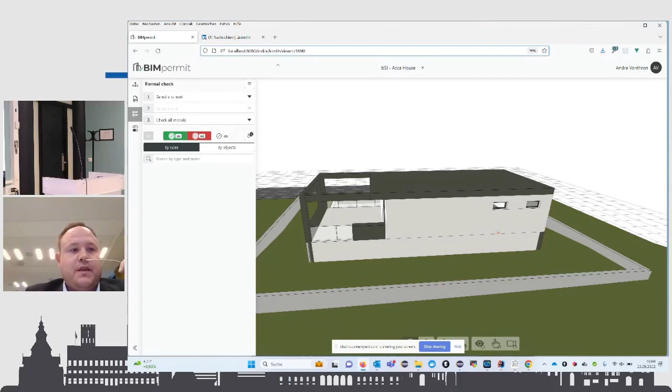Again, my name is Andre from VSK Software in Germany. We have a product, BIM Permit, and now you see the product, the model is loaded, and now we have here the IDS file from this morning with the 4 different requirements, and I basically can select here different IDS files, upload them. I showed how to edit and import, export them yesterday.

Then you can also select partial rules of it if you just like to check one part of one specification. And then you could also select which model I like to check. In this case, we only have one model, so I just check everything. And then I can execute it. And on the left-hand side, I see how many were successful, how many not in the specifications. And then I can dive into and see what objects were successful, which objects were not.

And we see in this case, we have stair flights and stairs, where stair flights are part of stairs, depending on where you define the specification. In this case, it was defined for both. So we have some positive and negative objects. You can dive into and see, here, some classification may be missing, and in the other one, you can see it here.

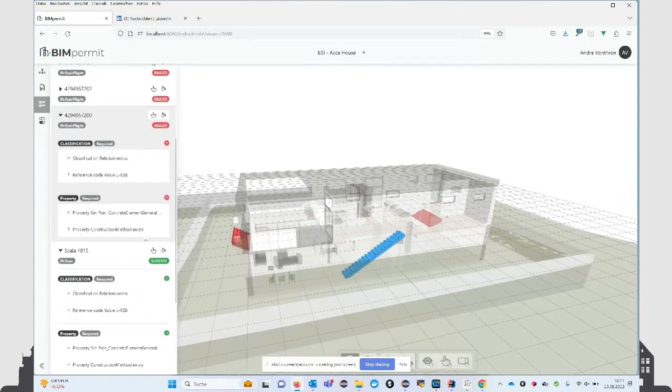It could also select one of the objects and then retrieve the properties and see, okay, in this case, we don't have any classifications here. For example, if we select the other one too, we will see that it's not selectable, it has no geometries, right? So in this case, not possible.

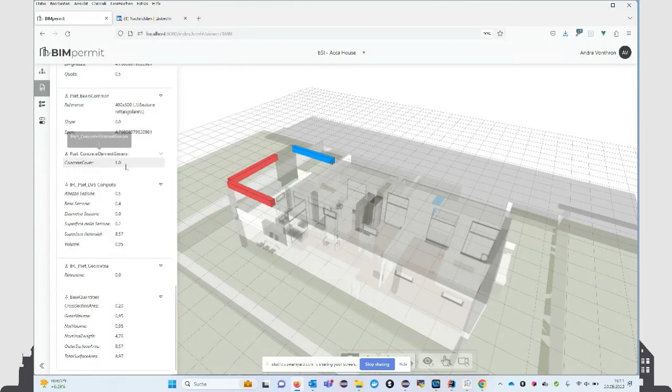Second example, when we look at the beams, we have also some positive, some negative. We have some properties here, and we could also inspect them in the property view and see, okay, I have my property. What do we have here? Concrete cover has a number in this case. I don't know if it was right, but we didn't set any data type and restriction to the value yesterday. So for this case, it's very fine.

Maybe because of the waffle maker, there is a case here where we said yesterday that it was an IFC element proxy, and that could have a specific classification. So in this case, as you can see, we have a lot of proxies which were tested. So the right way here would be to filter it first. So that does not apply 100%, but what we can do, we can find out. Let me see here. I have some. We can just select it and

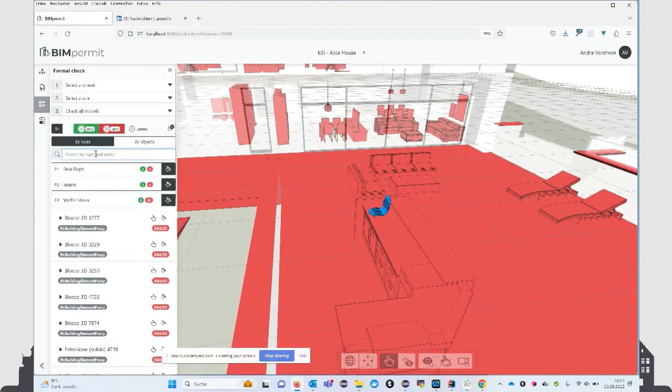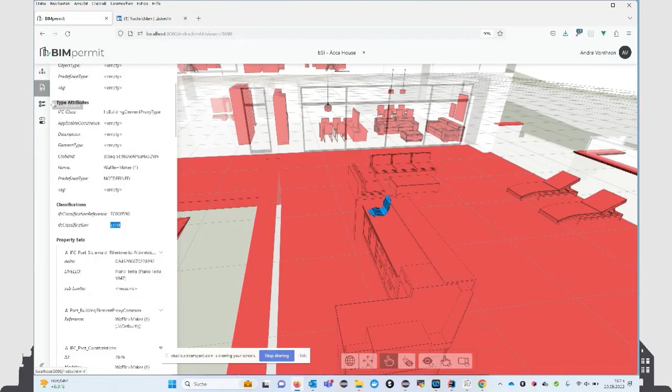So that is how it works in our software, and what you can do now to transport it to other software: you can export everything to BCF for this model and this rule set, and then you can go into your software of choice and import the issues you have. So I like to open here the current BCF file, and then you see all the issues if you have objects which were not fulfilling it.

Let me see, for example, the stair flights. We see the stair flights here, and now the configuration is that we export all failed objects and mark them. It will be configurable in future. So, for example, you could make other objects here also transparent. I think that is clear from the workflow.

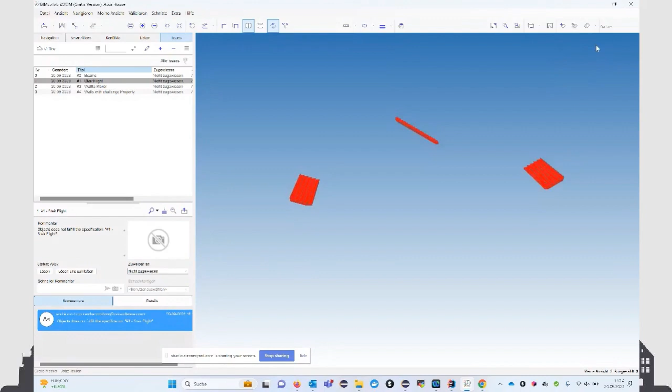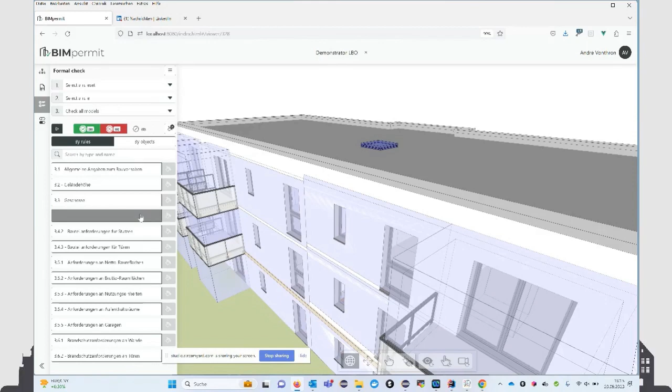And the last thing I want to show you is we made some examples here, but we already did it in working projects in Germany. So we have a pilot project for digital building permits, and we set up a modeling guideline, and we completely did it in IDS to have a digital representation of a large number of requirements. For example, you have here an example with the doors. The family was updated and the parameters were missing. And if you begin to do technical checking, it's very important to have these requirements fulfilled.

And that's all for my presentation, and I'm very happy to answer questions and give over to the next presentation. Thank you.

So including the screen sharing issues, you still had 6 seconds left, so perfect timing. That does mean we need to move on to the next one to make sure we are on time. Can you hold the questions till the end? Or if you're quick, until the next one is set up? Yeah. So there's a bunch of questions I wanted to ask each implementer. It's a second though, so they're very few.

One. So do you actually run the verification, the auditing of the IDS before running with this? Yeah, I think we had the question before, but there were some little issues I wanted to ask because of the parameter list from yesterday. So that would be interesting to discuss because we didn't set it up in the specification. But that I think must be fulfilled. I was wondering why it was not uploaded, but I can run the test if you have different results. No, I was just asking if your user interface presents to the final user the result of the audit. Okay. I will explain the reason why it's not. All right, next one.

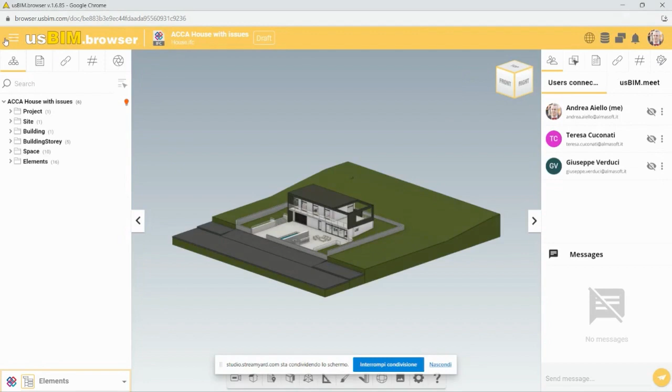Okay, thank you everybody again. Good afternoon. I'm going to show you the result of the check. So let's open my model and open our usBIM.IDS. I select the IDS from usBIM.

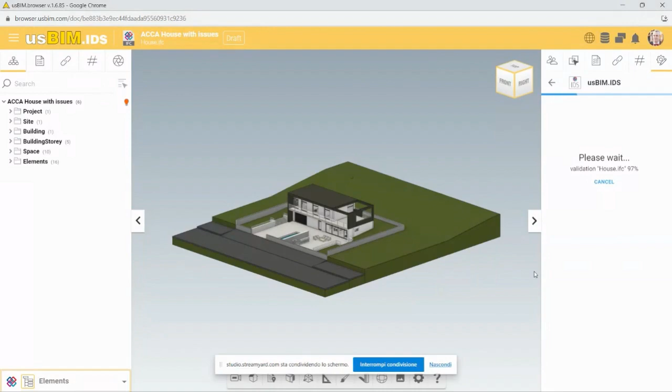I selected this one that Léon changed this afternoon, but it's the same result. In this example, we have 2 errors just to show you something, because otherwise we have no errors. It's more difficult to show you this part. So we have 2 errors.

They are already highlighted here, these 2 walls. And here we have all the 4 specification. If I click here, I have just a quick review of the info about the IDS. If I select here, I have the specification info again. I can read in English normal text, the model must contain, and all this stuff.

Here I have an issue report if this specification has some issue. If I click here, I have all the IFC elements related to this specification, and this for each one. If I click here, this is red because we have some errors here. The walls, the first 2 walls have something wrong.

And if I click on the single IFC element, I have here the problem, the issue. So in this case, property not found, error 301, we have coded the errors. So in this case, we have a property not found. In this other case, we have the property is invalid value because there is a letter S more.

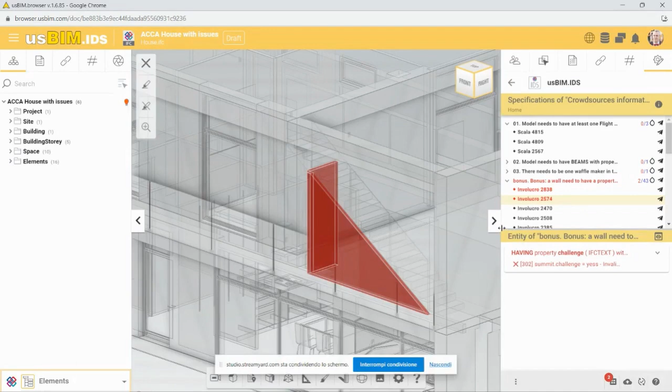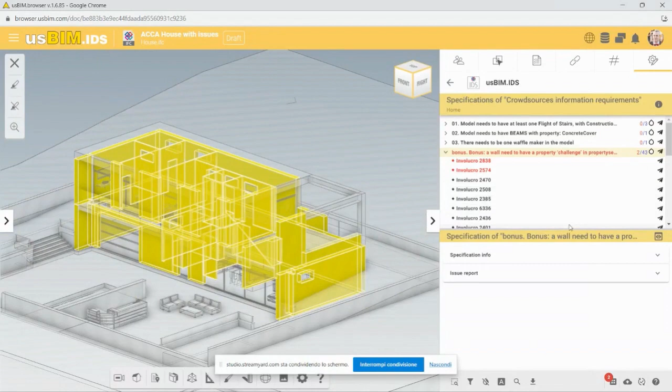So basically, we have a quick view of everything. We can select each of these elements. So I click here, I select the elements, each one or all together. I can, for each specification, give a color and see it colored by the element, colored by specification.

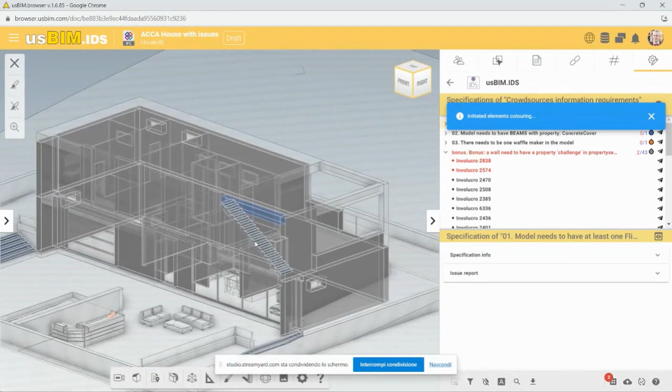I can create an automatic coloration. So if I go here, I click color by specification, I get all the IFC elements colored differently based on the specification they belong to. So I can have this view. And there is another view, color element by issue, because for each issue we have an error code and a color. So when I color by issue, they become colored in a different way.

Now we have just 2 types of errors, so it's not very colored, but believe me, usually it's more colored.

I can also show the error code directly on the IFC model. So this wall has error 301. 301 means not found, property not found. 302 is property value wrong. Anyway, here we have all the specifications and the types of errors that you can find for the facet.

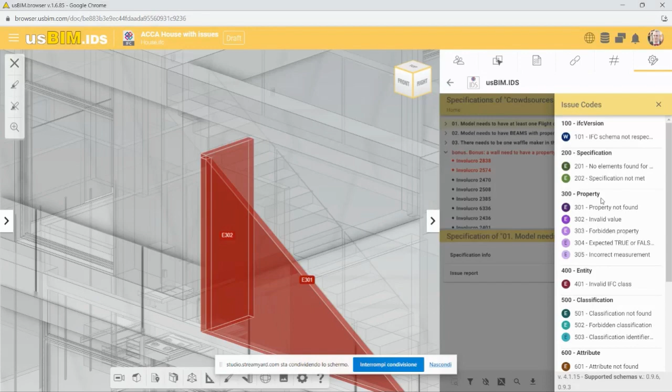And here we have a new view of the bugs, by a table view, so I can add more columns here, order the columns, or group them by code or by IFC element, and so on.

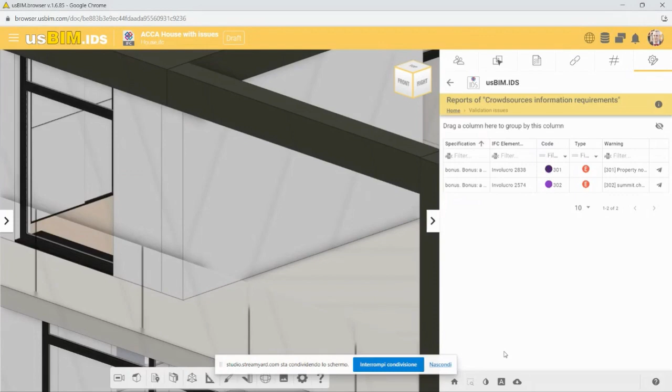After that, just to be quick, I can download the issues in a different format. I can download it in, if I go to, a BCF format. I can also download in CSV and Excel format.

I can also download a specific report of the issues with all the information about any specification, how many errors, what type of errors. In this case, it's very simple because we have just 2 errors. We can also download the IDS file.

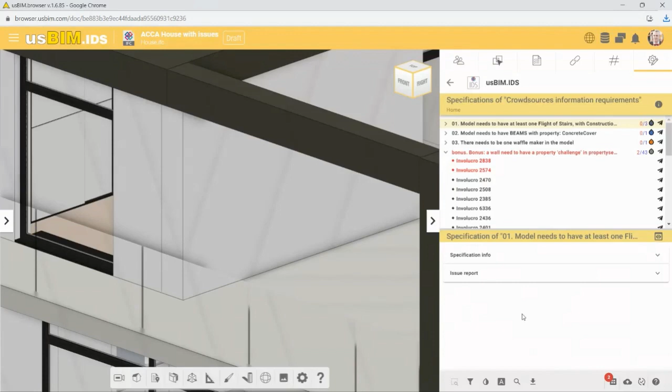So as I showed you, we can download the BCF file, ask to someone else to change the files, the IFC files, the properties, but we want to work in another way today. We'll try this because it's a BIM collaboration. So let's collaborate with someone else in another place.

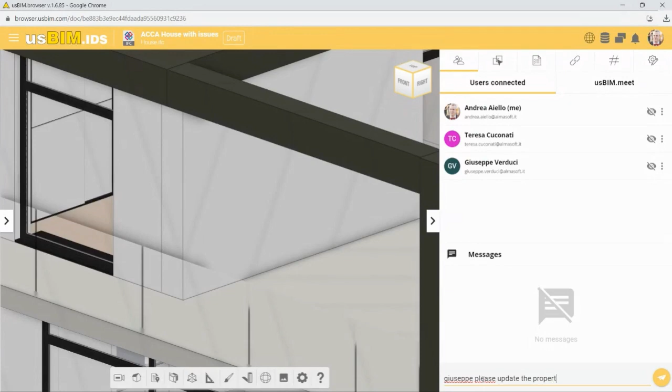So 2 other guys are connected here, Teresa and Giuseppe, that I want to thank because they are connected here. I can ask them to update the property. So I ask Giuseppe to update the first property, to add the property. Giuseppe, please update the property. Meanwhile, I change the property myself by using usBIM.editor.

So I select this wall and come here. Confirm. Wait for Giuseppe. Giuseppe, okay, he's doing it. It's quite fast, but we like to do this type of presentation, quite live.

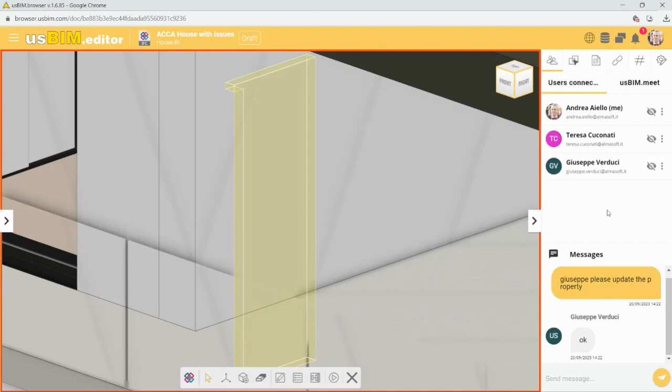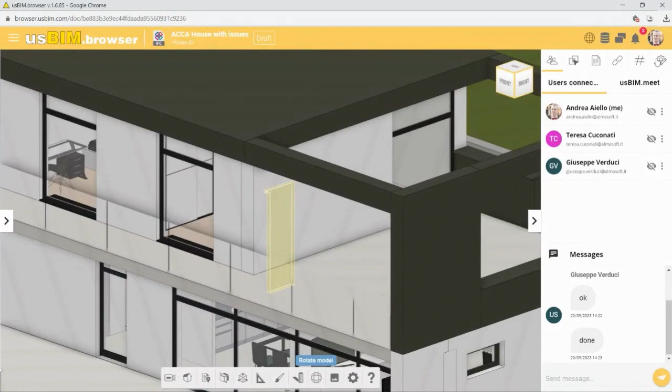Done. So I come here, I launch the validation again. Validation is okay. So the 2 properties have been added and updated.

If I click here and go to the property set, I see that now the property should be yes, with 1 S. Where is it? Okay, here. And the other one, just believe me, it's changed, it's been added. But now I just want to show you something more.

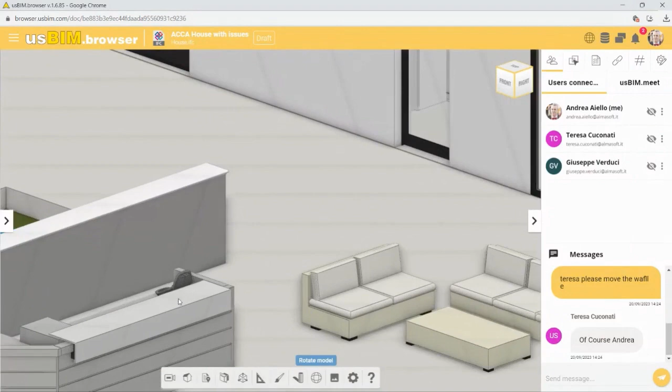Just ask Teresa. Teresa, please move the waffle, I don't like this place. I don't touch anything, my hands up.

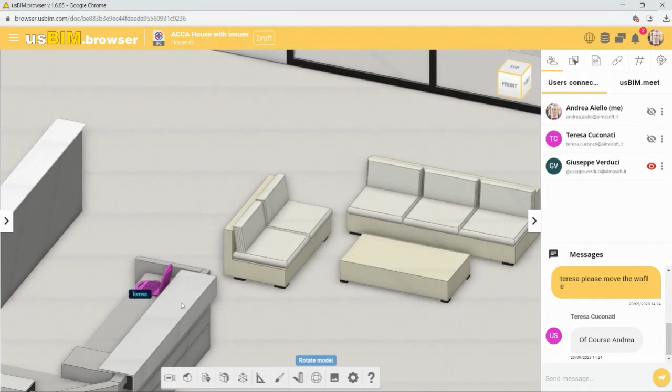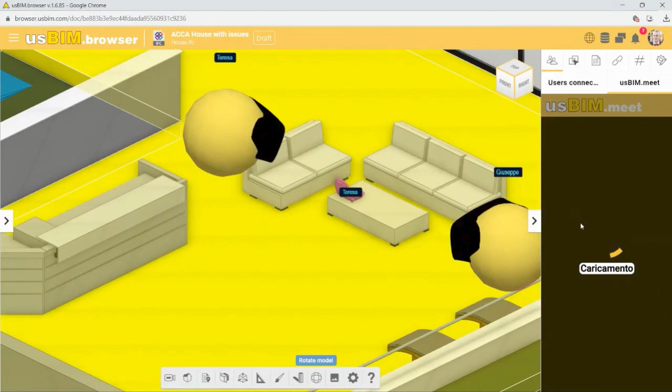She has selected the waffle machine, you can read the name, and it should move. This is Teresa, the avatar of Teresa, and this is Giuseppe. They are watching the same waffle. They are real men, so if we go here, we can see them as well. I hope so. Yeah, Teresa and Giuseppe.

Hi, hello. Oh, the camera is already, yeah. Hello Giuseppe, hello Teresa. But at the end, please Teresa, remove the waffle machine, I prefer pizza, so please remove it.

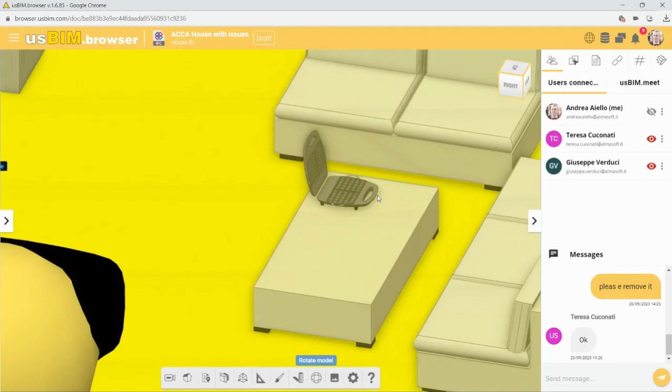That should be again hands up. Okay. And it's gone. If I come here, I validate again.

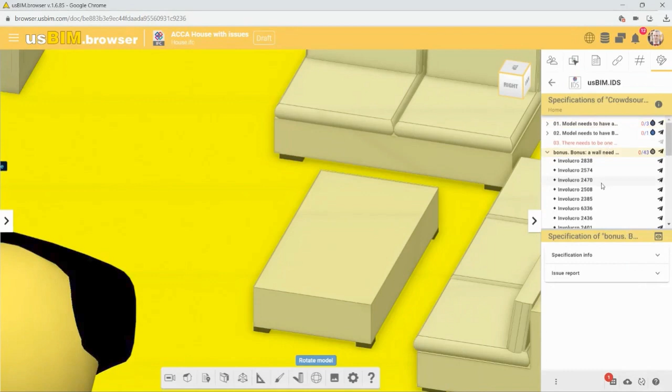20 seconds left, so they are prepared very well. But it needs to be saved. Who's next, Jeff?

If you have the results of the check, you can see the property that was required and the property that was there. And if you send it to BCF, are there new properties added to BCF from the required property and actual property? Actually, a good question. Yeah, that's a good question.

Okay, alright, here we go. So I've uploaded all the models that were produced already to the system. Personally, I also really like the Acca House, but we've seen it twice now, so I guess I'll use the BricsCAD model. So here it is.

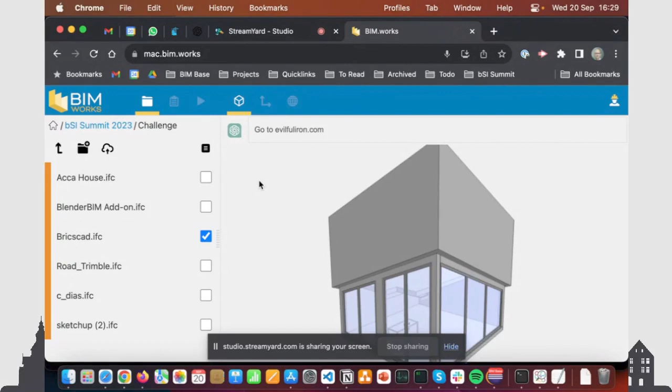I don't know what kind of website that is. Go to the waffle iron.

And I can't give a demo as fancy as Andrea gave, but at least this works. I can also say hide the waffle iron, so I don't need to ask my assistant in Italy, but I can just ask the system. It works.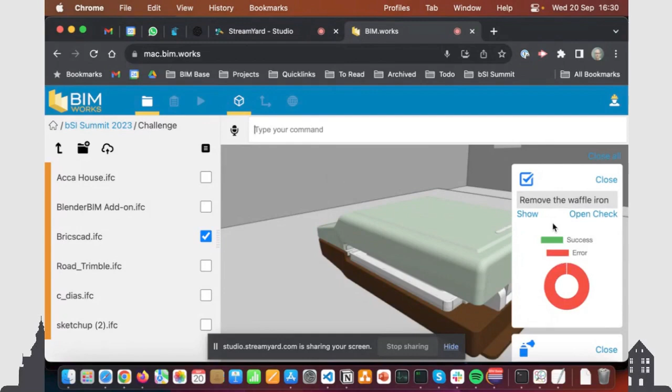Remove the waffle iron. This bit thought it was a model check that I want to execute, so it's a failed experiment.

Let's get to the IDS checks. So I've loaded the 5 IDS checks that were created, and you can also see that it automatically executed them. It will do that automatically, so if I load a different model, for example the Acca House, it will show you the results for that model.

The IDS files are actually quite different. I saw a few errors in mine. I liked the Diaso one. I'll just switch back to the BricsCAD model and execute that.

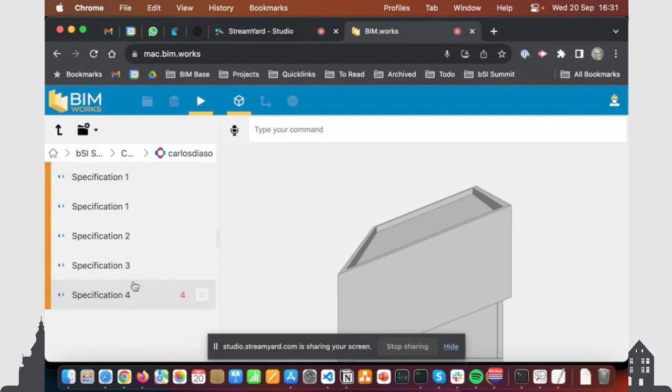You can see the specifications, and it will show you the amount of errors and the amount of successes, and you can highlight them. So that's the results. So these are apparently both waffle irons, and this one is a furnishing element, but it is not a waffle iron, so therefore it's red.

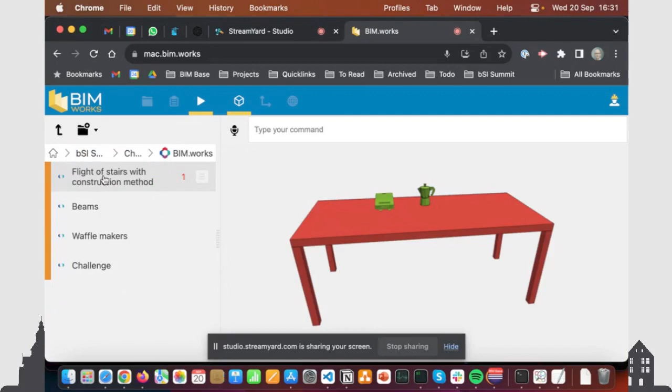You can also go to the BIMWorks specifications, for example the challenge, and see some results. So good. You can also iterate through them. In this case, the objects didn't have names, so that's a bit annoying. You can click on the items. That will show you that it has a property called challenge in the property set Summit with the value yes.

So, for example, waffle makers in the table will say there is no classification with this name. And it has also detected that in this case the requirement is a bSDD requirement, so we can click on this icon and see information directly from the bSDD. So it will help you with some information about it.

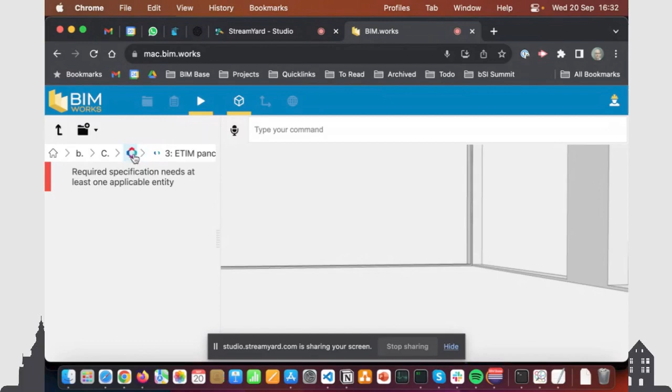So this is another IDS file that was created. In this case, for example, there were no objects to check, so the applicability phase failed for this one. Sorry.

So again, the four different specifications. You can go through each of them. In this case, the construction method was found, and we'll say the property matches the specification.

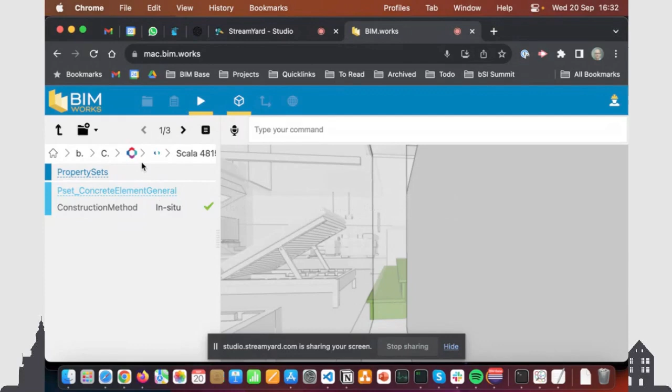Also, we can of course export to BCF, so you can download BCF. You can also look at JSON results, because our solution is actually only supposed to be used through APIs and SDKs, and there's not an end user tool, so this is actually what you will be doing most: visualize the results from APIs, if you get an idea. So we'll do this for all the specifications combined.

I'll try one more thing. Go to the waffle iron and change the color to the most realistic color of the waffle iron.

It's extremely slow. That's the processing. Go to the waffle iron. It's okay, go to the waffle iron.

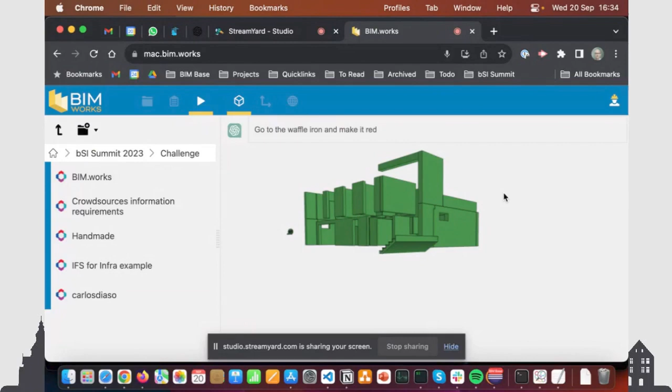So it has identified that we're using this ETIM classification apparently, but it's only... I hit the back button of my browser. I'll leave it at this. Thank you all for listening.

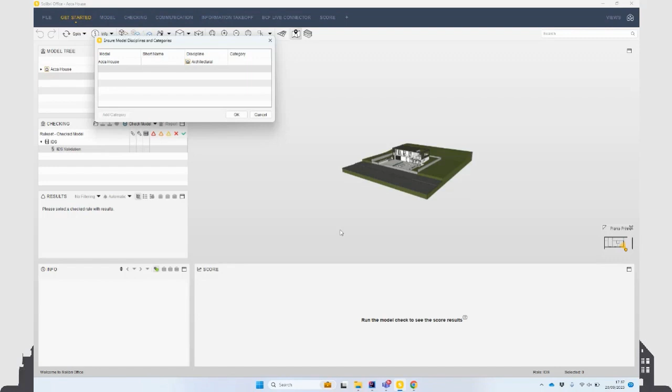So then I will go here, and I will choose... first I will take this. Ooh, that shouldn't have happened. Oh, because that was an IFC file.

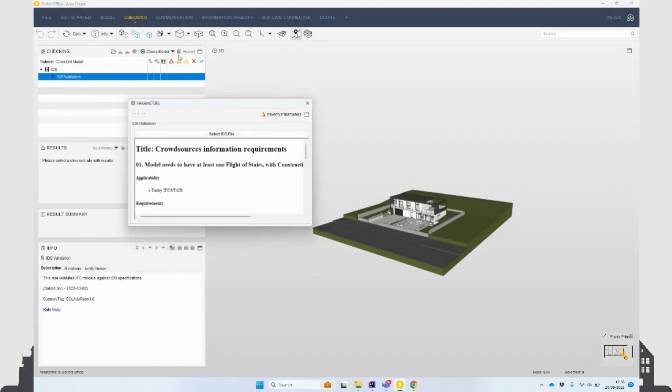So this is the IDS file. It shows it in a kind of user-friendly way, and then I check it. This IDS file passes, it has no errors. I'll take another one.

So I think it was this one that will cause some problems. So this one has some problems - the classification. I added this classification because the IDS file didn't have the classification system specified, so I just added something. So these stairs don't have the classification.

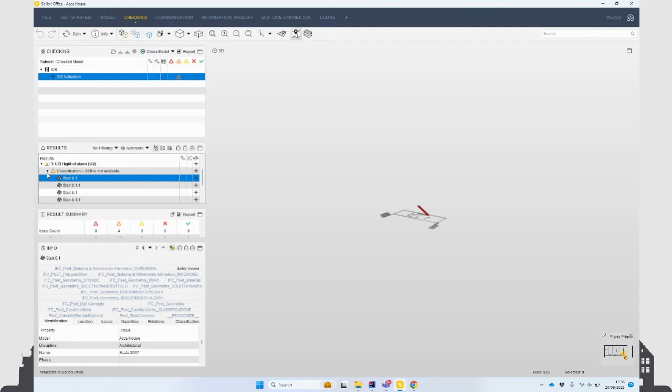So what I can do is add an issue here. Then I will go to BCF Live. I have connected this to Aconex, and I choose this one issue, and then I send it over to Aconex.

And then when we go to Aconex... where is it? Oh, what is this? Okay, I hope they're here, the issues. The model is here. And where do I see the issues? Here.

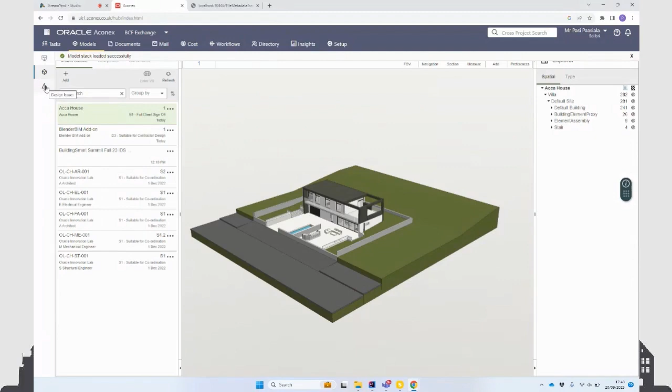Okay, there was - I didn't set up the model mapping here in file sync, so I need to do this. Maybe I need to click on something and mark it red so that it's sent over again. Let's see. But I can also map it here. But you get the point - using Documents API to get the model, using IDS to check it, and then BCF API to export the results.

When is this going to come in the Solibri product, officially? Well, the IDS is not yet released, the standard is not ready. So we need to get it ready first, the standard, and then once it's ready.

So you're buying more time. No, I mean, we could put it as it is, but I don't think there's a point, because the standard is not ready. Is it going to be possible to also create and edit IDS files, or just to import them and run them? At the moment, we only - because there are so many systems where you can create IDS files - so we don't.

Perfect. So I did not need to do too much here, because actually in the morning session, for who was here already, I modeled this. Don't be fooled by this joke of a model, because I focused on the metadata, to have the right metadata here and not the geometry. But I had an error, and that error was because I was not seeing something, and it would be cool to just run and show that.

And here I'm using Blender BIM. By the way, for who doesn't know, this is a free open source tool. You find it at blenderbim.org online. Everyone can use it. And Blender BIM has a tool inside here. Here on the project overview, if you go to collaboration and quality and coordination, there is a tool called IFC tester. And here I can load an IFC file and an IDS file, right?

In my case, because I loaded already this model, I can just click here and load from memory. It will automatically consider this model. And I wanted to generate an HTML report. That's going to be an offline report, so this is not uploaded to any website. And now I'm loading the IDS file from here, and I use this file.

By the way, when I modeled this, I started with the IDS, and all the conditions were not met. Everything was red, and everyone who was here saw that everything became green, except one thing, which was this thing here. So after executing the check, you get this report in the browser, and the error was for the waffle maker, which doesn't look like a waffle maker. Yes, it's just a cube, but it has all the properties and everything. But we can see here that we get an error because of this ETIM reference; actually, I used ETIM 8. I've seen this used differently in different IDSs, so that's why.

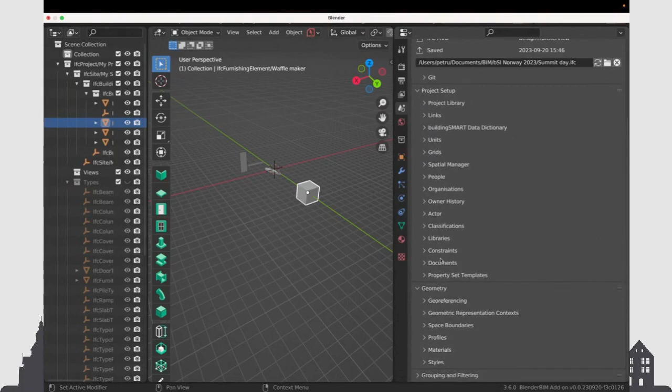So if I go now in my IFC model, let's see, I need to load the bSDD and ETIM, make it active, and then go to classification. And we have it here, and we can see that unfortunately I added this number 8, which is the thing that generated my error. And now if I just go back after updating that, execute IFC tester again, everything passes.

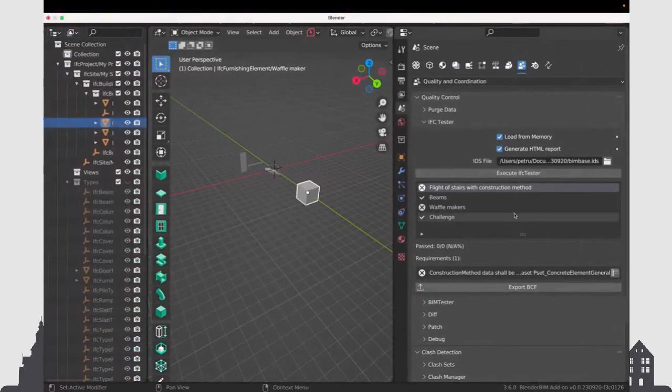Now, as you can see here, I used the Acca IDS. I will take another IDS, because there were some differences, and we will see some errors. I'll take BIMbase in this case, and I will execute it. And we see that we do not get this right. If this applicability is not correct, it will not work. And I already see what's the issue here. I see that this data needs to be classified as LXBB, which I don't think is correct, and that's for the stair, right?

Yeah, so if I go to the stair, and if we look at the classification reference, I think the correct classification is LXSB according to bSDD. So that's the reason why it failed. It's not failed because the data is wrong in the model, but the IDS is wrong in this case, and that's why the requirement will also fail. If the applicability fails, the requirement will also fail.

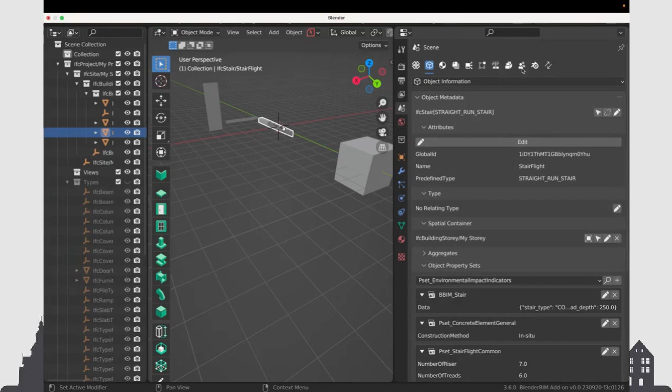So that would be it. You can download IDSs from each software, and you can run them in Blender BIM for everything. And by the way, this is very relevant for me because I use this in real life in my job as BIM coordinator, because in my project I am not allowed to upload models to any platforms. I work with confidential models that I must not share. So in this case, this tool works perfectly.

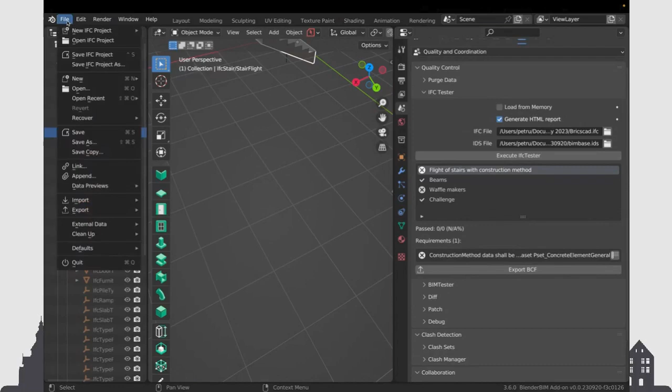Does it show the same thing in the 3D view? You don't see that. Actually, you don't need to load the model in BlenderBIM. You can just load it here. Yeah, you need to load the model in the viewer if you want to see it. That's no problem. For that, you go to file and open IFC project, and load it from here. It will take a little bit of time, and it's going to show up here also.

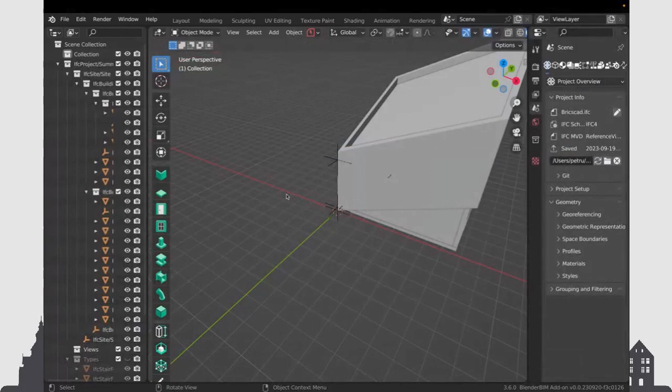You were also searching bSDD in the right part, or was it local? Yes, you connect to that library now. This was not here on Monday. Dion integrated this yesterday. So now you just click there, you connect to bSDD, you choose which library you want, Uniclass, ETIM, whatever, and then you add the classification for your kind of objects.

This is the model, as you can see it here. And now if I go back to run the IDS, I can again load from memory. It will use this model and the IDS file again. Let's take BricsCAD again. And there you go. You see that again.

Actually, you can do these things even without the interface. You can use this just by using Python, because of IfcOpenShell, but it's a bit more advanced. I love it. Okay, cool.

No other questions? Thank you again. You're welcome. Bexel, what's next? Okay.

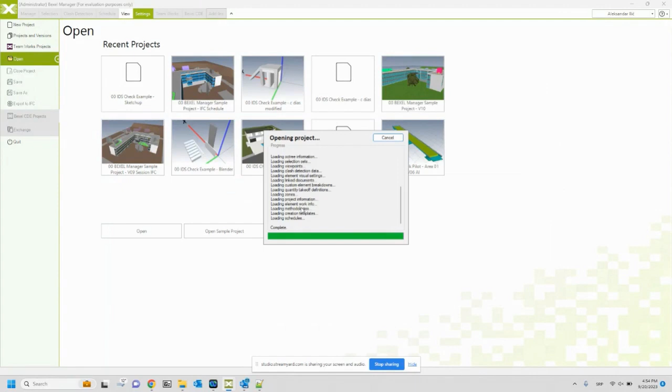Okay, we will try to show the best of the two worlds, desktop and cloud-based, and how you can communicate. In this case, a new project is added with one of the sample IFC files. So it's now imported. In Bexel, you have a powerful API and you can develop your add-ins. In this case, this is an add-in, so everybody could develop or change this. It's fully open source. You can customize this.

We previously used our own standard in this add-in. In this standard, you also have additional options, which we hope we'll have in IDS in the future, so you can choose the phase of the project and the use case. But in this case, we'll just load IDS. And just run. You have the option to execute it across the entire project or just selected elements. When the data check is finished, you can create selection sets, which we will use later for BCF communication, for all rules or just selected ones.

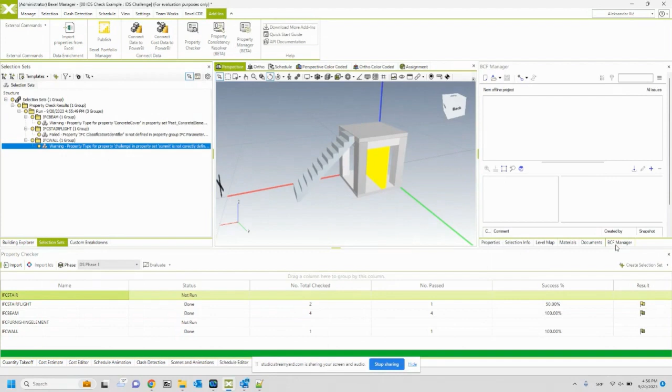And maybe we can show them here. It's organized in a folder structure. Another idea: BCF should have folder structure in the future if possible, or at least tags. Thanks, Ruben. And now you drag and drop this. In this case, we are using BIMcollab because Léon is here, so we have to use something from the Netherlands.

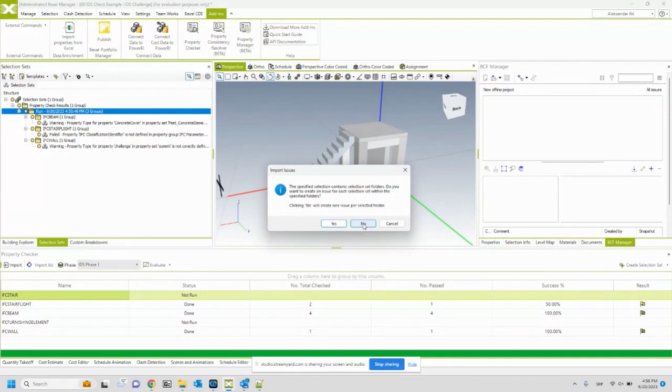I'm just kidding. Of course, this is an integration with BIMcollab. Could be any other BCF client and server. And you have now two options: one, to create a separate BCF file for each of the checks, or a joint one. In this case, we'll go with the separate. So you see 3 files are created.

So, one for each check, and now you can go and just, please do not go now. But okay, now you can just send it to the rest of the team with BIMcollab, or you can save it as a BCF, and if you're working in a closed environment, not share with the others.

Okay, so now, Alexander, if you can change the properties. So like a team, I will just ask Alexander, can you change this? You can also ask someone in Italy to do that, but you need to have a very powerful voice.

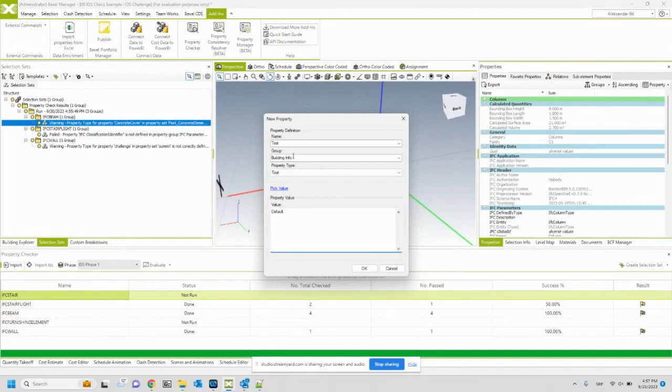Okay, we have it on the cloud communication and here as well, but it's not prepared. So he's adding a new property, value, and so on. And now maybe you can show another IDS, where we added several new rules. So a range was added for certain values and an additional check for the property. So the range is maybe 0 to 0.6 for a certain value.

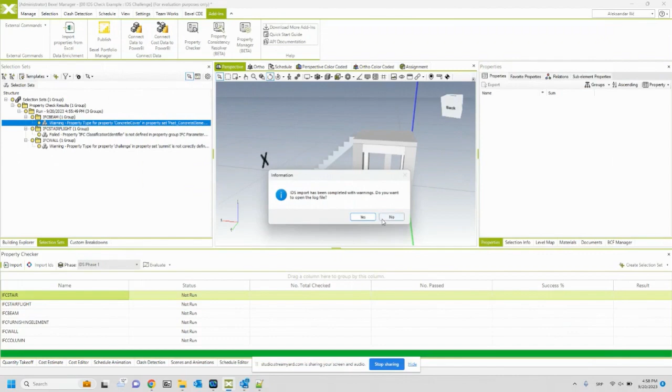And this added is an allowed list. So default must be for that test property. So this is added. Again, go back. And now just open this again. So this is fully open. So you can change it, add new functionalities, and run again across all the elements. And you see new results.

And you see that it is 75% and a certain one is 50% because just 2 elements have fulfilled this criteria. Again, create selection sets, and you even have a history here. So you can see the previous results, compare what was better or worse, and so on. Again, you can drag and drop this. Since we have not synchronized this, we need to manually remove, drag and drop, and now you will see 4 BCF files.

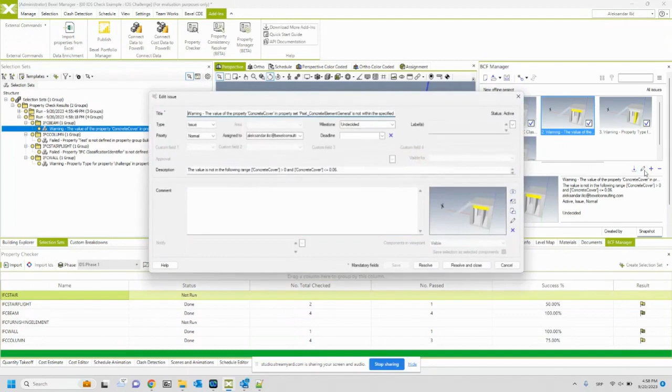It also shows that some elements are missing, so min occurs works. So you need to know that it was not checked because the elements do not exist. Okay, and now we will publish this. And another interesting thing, it's almost IFC 5. So in Bexel, you are not dependent on the original IFC files. So you can slice the organization per zones, per functional elements, per level of detail automatically.

So now Aleksandar is publishing this to the cloud, and instead of source, you have the option to choose any selection set organization. So it's fully customizable and very useful for analysis and use cases, since you don't want to load elements based on the original IFC. But in this case, we'll go with source because it's extremely small.

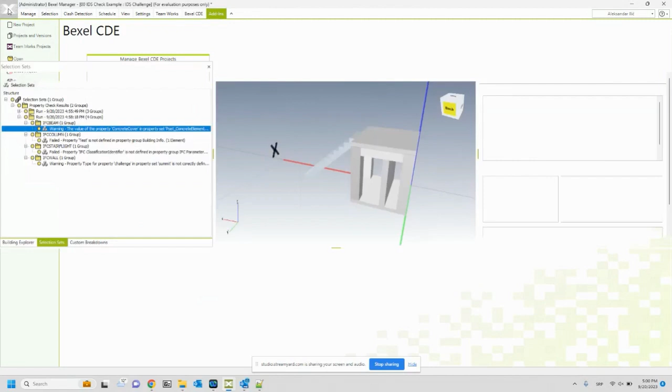And we will also publish, okay, maybe just go with the last. Let's say you decide which selection sets, then color schemas, but I'll show you later how to use this. In this case, we don't have our schedule simulation. I'll show you this later as well. So now this is publishing to the cloud. If it's a closed environment with protected data, usually you don't publish anywhere, but if you want to share with the others, you have this.

Okay, it's created. And now we are about to publish a dashboard. We have several templates, data checks, naming convention, material checks, and so on. But in this case, just the property check will be used. And you use the version just created. You choose the option to automatically load the elements, because on large files, you don't want to load the entire model with 500,000 elements immediately. But in these small projects, it's loaded immediately.

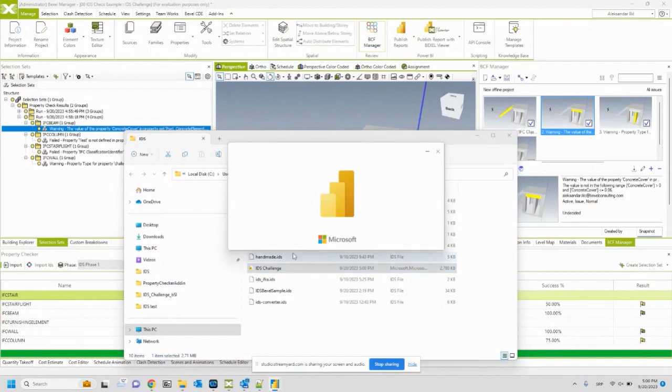And now Power BI is generated. And in Power BI, you have a Bexel CDE.

So you see, Microsoft technology is slower than ours. I'm just kidding. I know I should work with Apple, but I started with Microsoft when I was a kid, so unfortunately, I cannot do that.

Okay, just refresh data, and the system is now refreshing this, and you will see interactive dashboards for property checks. Okay, publish this. So you see, just go publish, and now you have a full system of checks.

So you can decide, similar to what someone else presented, shall I see the elements which do not fulfill the rules or fulfill the rules? And of course, filter, it's fully interactive. You can see statistics. And I have to say our clients are heavily using this as a way to check the models. Okay.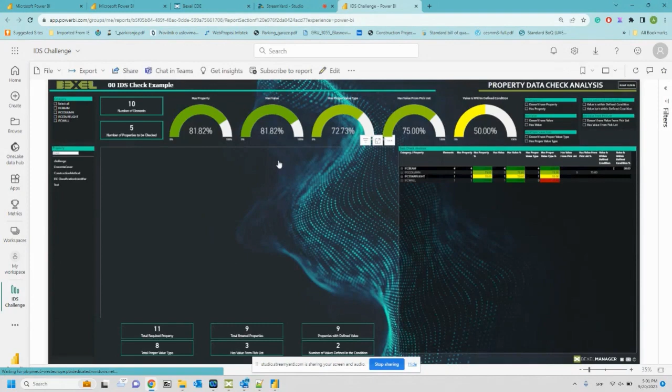This animation you can hide, but the last sample will show this as well. So now you see all these numbers. Maybe you can highlight any of this and see. So certain elements fulfill, certain do not. But show this one with the part.

Okay. So you can filter: show me the elements which do have properties within the specified type, if the value is allowed. So there are different types of results. You can see maybe properties are there but the ranges are not there, or properties are there but the value type is not there. So of course, again, fully customizable, so you can develop your own and so on.

And then of course you can filter the opposite way. If you have more properties like uniformat code or any others, then you can go on the right-hand side and filter per property across all data checks. So I can see which element does not have Uniformat. So you can mix the way, and of course you can reorganize this as well.

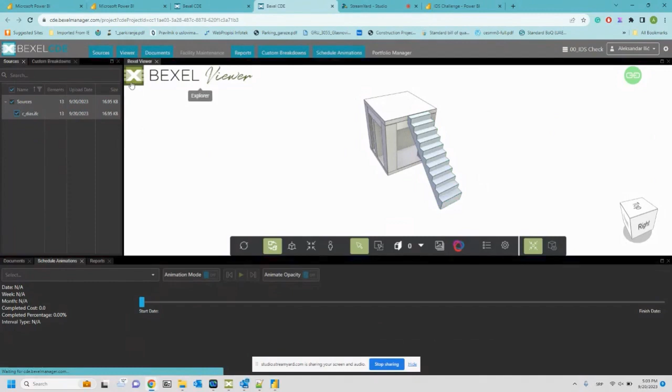Okay, and now just maybe to show how it looks on a slightly larger model. Maybe you just open this on CDE. Okay, so on a CDE you open any version. Of course, you can define access rights, and just load this small model. And in this small model, of course, you have properties, filter this, but you also have this check, so you can see all results and what is missing and so on.

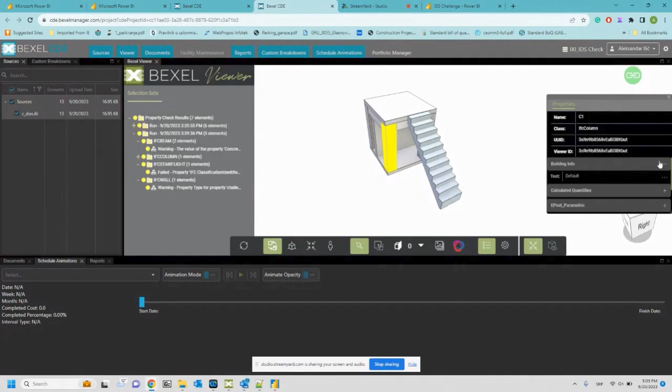And last but not least, you can search properties. Of course, you can filter them, maybe show the values or something else. It doesn't matter. So you can filter per property, but this is standard functionality like other software as well. Just go back to the dashboard for a slightly more complex model. Okay, so this is how it looks.

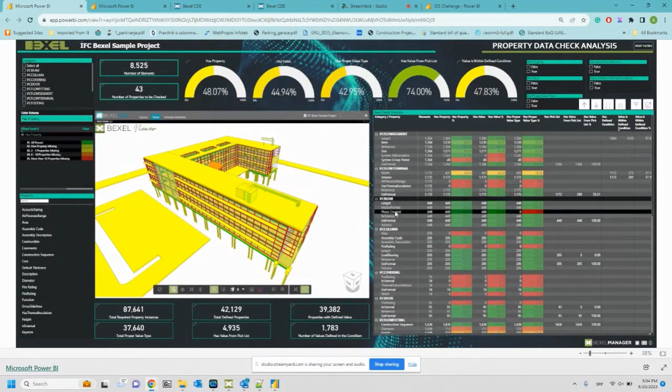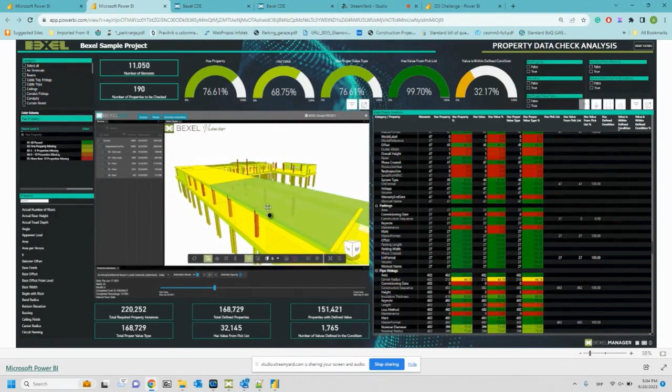And the statistics numbers you can filter. In this case you have 40,000. We have examples with 2-3 million property checks. Can you just show the end animation? So what you see in the construction phase, with the color schemes, is where the elements which do not have properties occur. So based on that you can focus on priorities, certain elements missing in the beginning, and so on. Okay, thank you.

So last one, ODA? Yep. Last one, Claudio? Still last one? Okay, so ODA last one. Start. And I remember you asked not to use PowerPoint. I used Google Slides. There was no protection, but I use it.

This is the last presentation. It may be boring, and therefore I decided to make it more interactive. I'm going to show everything, but everyone can follow along. I'll share again. This is a QR code to the small guidelines, so it's not a big presentation.

During my presentation, during the 10 minutes, you are able to download Open IFC Viewer. There are 3 steps you need to do, and you are able to check the data by yourself. It's quite simple: Open IFC Viewer, and just 3 steps: file options, set a folder with IDS files, and plugin model validation.

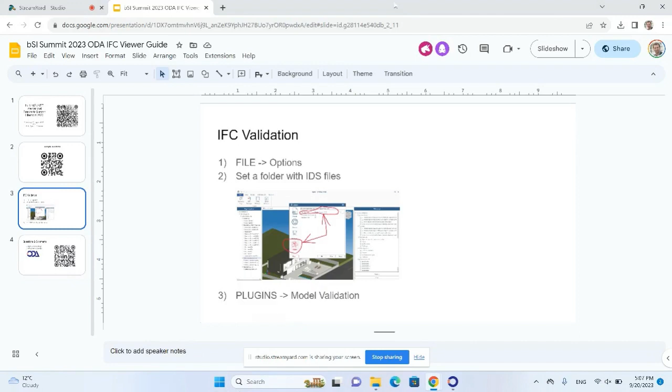What I'm going to show: I've already loaded 2 files, and SketchUp, because no one uses SketchUp, and I think it would waste everyone's time. Someone decided to add this file as well.

So Open IFC Viewer is available for everyone. We provide it as a service for industry, but I also need to mention that it's a demo of the technology that is provided. We saw here the SaaS solutions. Here you see the desktop application, but below this, ODA members, and many here are ODA members, have access to the toolkit and can use it in SaaS applications as well.

So like I mentioned, you go to file options, and in plugins, IFC model validation, set up a folder with IDS files. It's right here, bSI Summit.

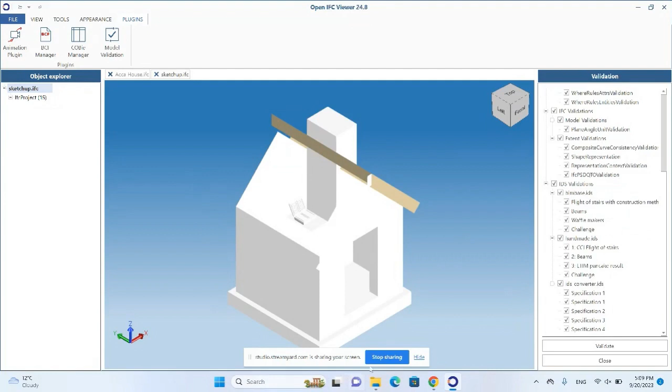Okay, load the models, and let's try SketchUp plugin: models validation, data access interface, IFC validation, and IDS validation. At the moment we have the folder with 3 files. We run validate, and we have a lot of errors, but many of them are in property and quantity sets take-off. We are not interested in those ones, so we apply filters, and we see fewer errors; after that we can investigate and see those errors.

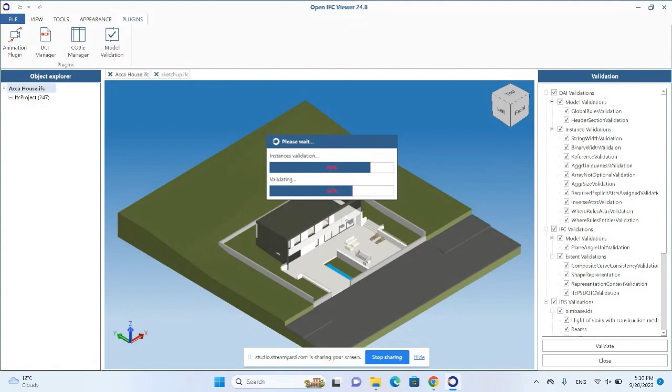Yeah. And we can do the same, just to show that it works, because I have time yet. It's quite fast. And we make model validation for the Acca file. It's a bit bigger one, and therefore it takes more time. It's not hanging, it works. Well, in these files we have 5,000 errors.

So we implemented, I would say, full validation of SDAI and full validation of IFC, but I'm not sure if anyone is going to use our validation, because in industry there are no files satisfying all criteria that should be in the standard. But okay, we can apply filtering for these ones. And if we go to the IDS, it's the same set, quite a small set of errors. You can check.

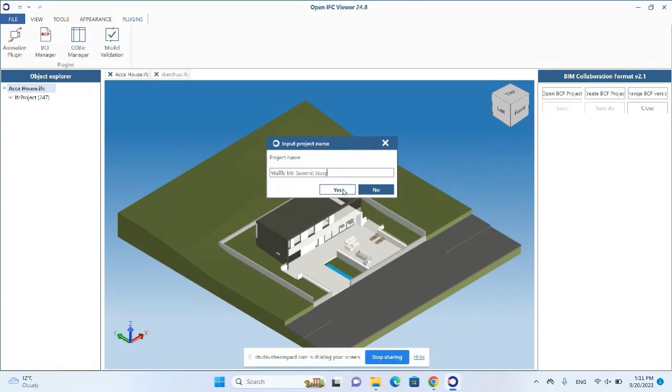Also in this application BCF file support is presented, and we can add our BSI summit story. A topic, no, not yet. A topic, selection site, okay. Story, certainly the first, highest priority, and okay.

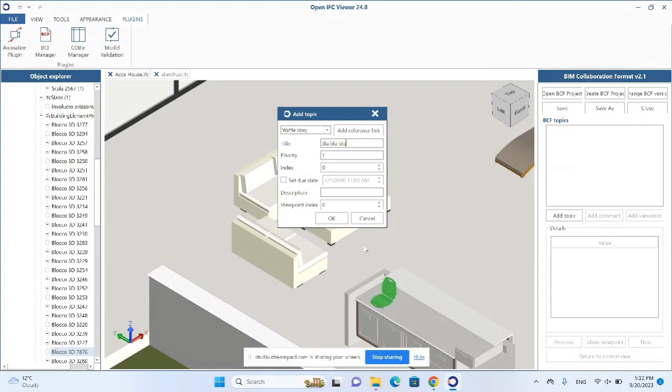And we also can save this BCF file. Here you see 2.1, but the Toolkit also supports BCF collaboration format 3.0 as well. So that's it, what I wanted to show, and it is open. You can use it to check files in everyday life, and also use this technology, because many of you are our members, Solibri and ACCA, and we are happy to see you as our members.

The IDS specifications you have, is it something included in the software? The IDS checks, you have many hooks there, right? No, what do you mean? The IFC validation you showed. Yeah, IFC validation is inside the software. IDS is just the external file. So you imported an IDS file into the software, and part of the validation is hard-coded checks of the IFC file according to the schema and standards, plus IDS. Those ones I mentioned are not part of IDS. I can turn them off from the panel and make a check only based on IDS.